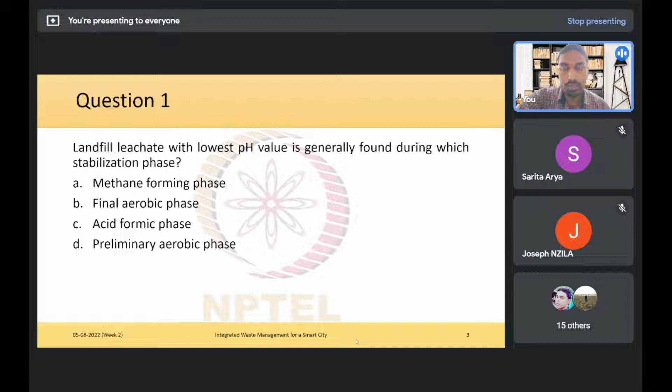So when the fluid is more acidic, it's going to have a very low pH, right? Out of these four phases, the lowest pH will be found in the acid forming phase. Why? Because as the name suggests, in this phase of landfill stabilization, the higher order molecules present in the waste are converted into lower molecular weight compounds, and then into acetic acid, right?

So if we look at the pH of the leachate across these different phases, starting from the preliminary aerobic phase, the pH keeps reducing, and as we enter the acid forming phase, the pH reaches the lowest value, then slowly starts increasing once the acid forming phase ends. When we go into the methane forming phase, it stabilizes and remains constant. Because of the acetic acid produced in the acid forming phase, the pH is lowest in this particular phase. So the correct answer is C, acid forming phase.

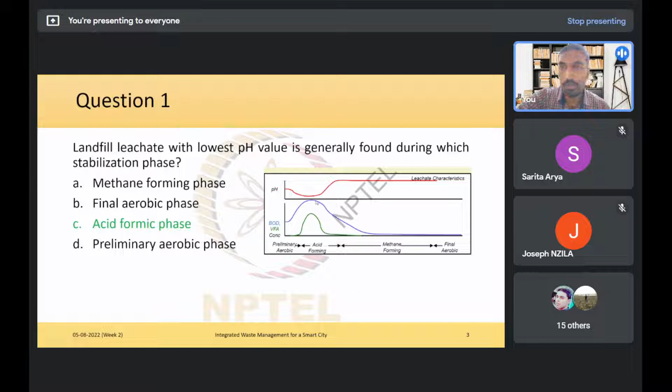Okay, so next we'll move on to question 2. Which of the following is not generally found in landfill gas? The options are methane (CH4), carbon dioxide, argon, and hydrogen sulfide (H2S). The answer to this is option C.

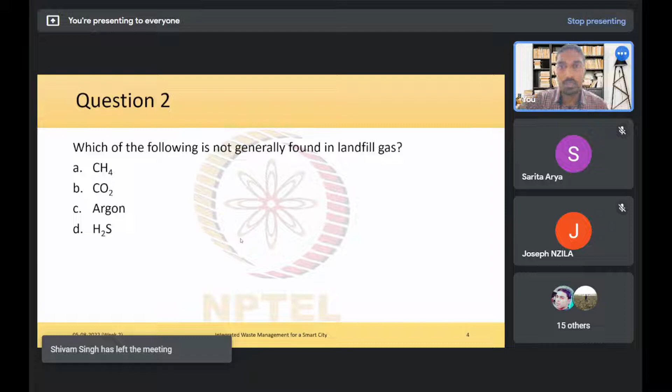Argon is an inert gas, right? When we look at landfill gas, it typically contains different gases. It contains methane, carbon dioxide, some water vapor as well, and hydrogen sulfide along with other non-methane organic compounds. In some cases, if it is hazardous waste, vapors from heavy metals can also be present in the landfill gas.

But it's not typically found. The ones listed here are what are typically contained in landfill gas. So we don't have argon, but we have all the other three: methane, carbon dioxide, as well as hydrogen sulfide. That's why it's option C, argon, because the question is asking which is not found.

So in answering these types of questions, you could follow the elimination strategy: start eliminating those options you know are not correct. In this case, we know methane, carbon dioxide, and hydrogen sulfide are present in the landfill gas, so we can eliminate them and we're only left with C, argon. That's one way to answer these types of questions.

Moving on to question number 3, again related to landfill gas. Why is the emission of landfill gas to open air a point of concern, if we don't collect it and just let it out? There are 4 reasons given: only due to its odor, only due to its toxicity, only due to the presence of greenhouse gases, or all of these—odor, toxicity, presence of greenhouse gases, and explosive gases.

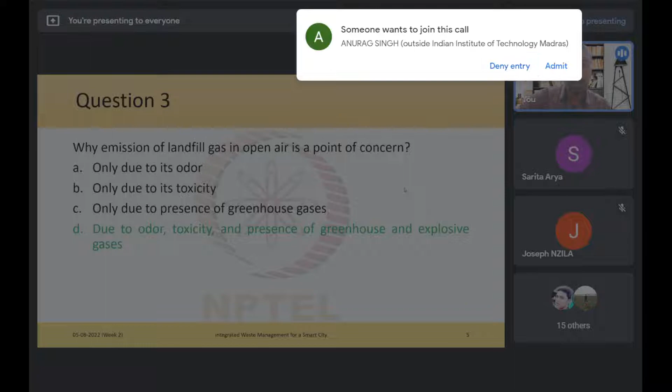As we saw, there's a mix of different types of gases in landfill gas, and each of them has different characteristics. The answer to this is D—all of these are a problem with landfill gases, as some of them exhibit these characteristics. As we saw, there is methane, carbon dioxide, and hydrogen sulfide.

Which gives the odor issues? It's hydrogen sulfide and methane, mostly methane because it's present in the largest volume. And which is toxic? CO2 can be toxic in higher concentrations. It's also a greenhouse gas, and methane is also a greenhouse gas.

And the explosive gas is methane—it's known to be explosive. So all of these are issues that come from emitting landfill gases in the open. That's why it's a point of concern that we should not let it out in the open and should properly handle it.

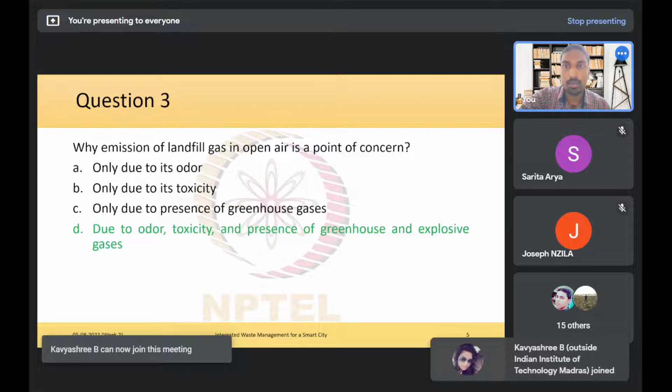All right, so question four. This is about the toxicity characteristic leaching procedure, the TCLP test, right? This was covered in lecture 7. The question is, what is the correct order that is followed in this particular test?

There are multiple steps to it. So we see in the options the different steps that are in this particular test, but they are rearranged, so they're not in order. Only in one of the options is the correct order given. So the question is, which one is the correct order?

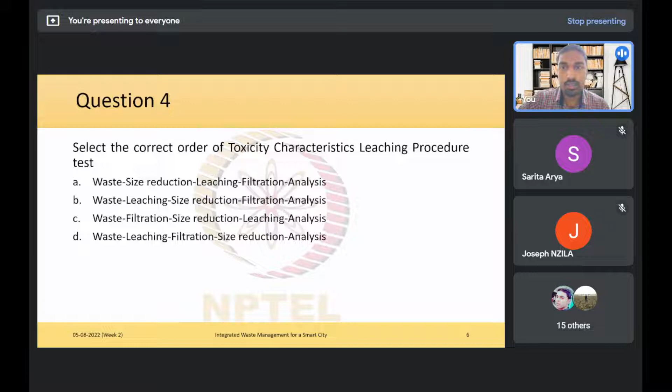Okay, so the correct order of this particular test is given in option A. First we start with the solid waste. We receive the solid waste, and then the second step is to reduce its size. We break this solid waste into smaller chunks of size less than 1 centimeter each, dividing them into these small blocks.

Why is this size reduction necessary? What does size reduction do? It increases the surface area. The area that is exposed is going to be much higher than the original solid waste that we had, because by breaking it down into very small pieces, we get a much larger surface area.

Why is that necessary? Because when we are trying to characterize the toxicity, we want to be more conservative, more strict, because it has potential to ultimately affect our groundwater resources. So we want to be more conservative and stringent, and therefore we increase the surface area so that the reactivity of the waste increases.

So once we do the size reduction, then we go for the leaching. Once we have more surface area, then we do leaching. How do we do that? We take 100 grams of this reduced sample and add it to a leaching fluid. For 18 hours we keep that in the leaching fluid at an rpm of 30.

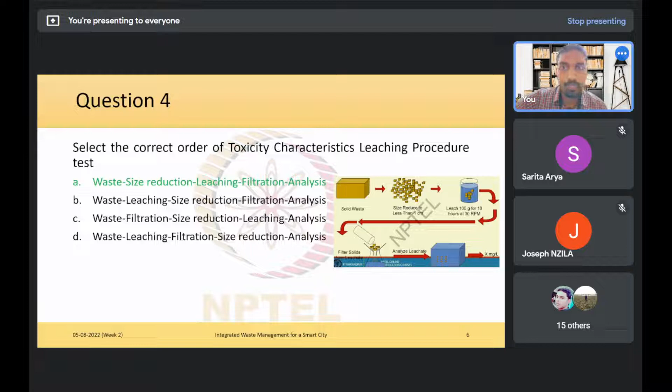Okay, I will give you a minute so you can try to solve this. In the meantime, I'll create a poll, and then once you solve it, you can answer in the poll. I think it's straightforward - if you know the formula for moisture content, you could go ahead and calculate it. So take a minute and try to solve this.

Once you solve it, I have created a poll, and then you can respond to that poll with your answer.

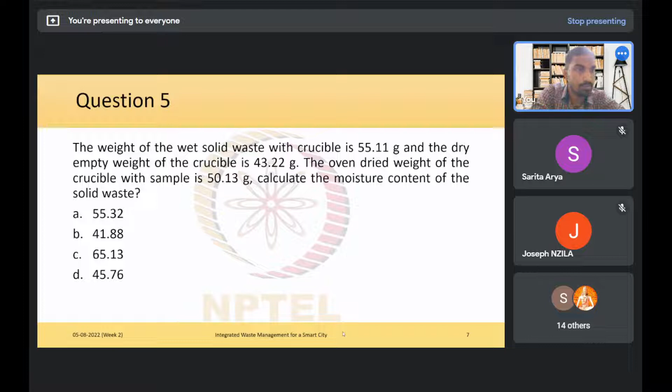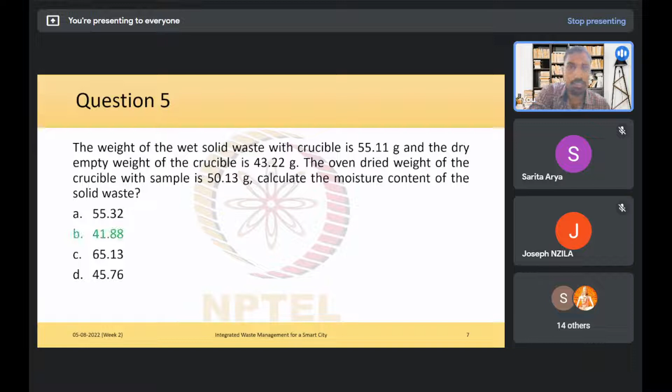Okay, I think that's enough time for this particular question. So there are a few answers - some think it is C, there is one answer for B. Okay, so the correct answer to this is actually B. How is it B? We'll see how it is option B.

Okay, so what do we know about moisture content? Moisture content is nothing but the mass of water divided by the total mass, right? So that is the moisture content. If you want to express it in percentage, you multiply it by 100. So we are given all this information to get the mass of water and the total mass.

So how do we get the mass of water? We are given the weight of the wet waste, which is 55.11 grams, and this weight is inclusive of the weight of the crucible itself. And we are also given the dry empty weight of the crucible. Also we are given the dry weight of this waste along with the crucible, which is 50.13.

So if you want the mass of water alone, we should subtract the wet waste weight with crucible and subtract it with the weight of the dry waste. So 55.11 is the weight of wet waste, and 50.13 is the weight of the dry waste. So the difference between these two is nothing but the mass of water. So we know that we got the mass of water.

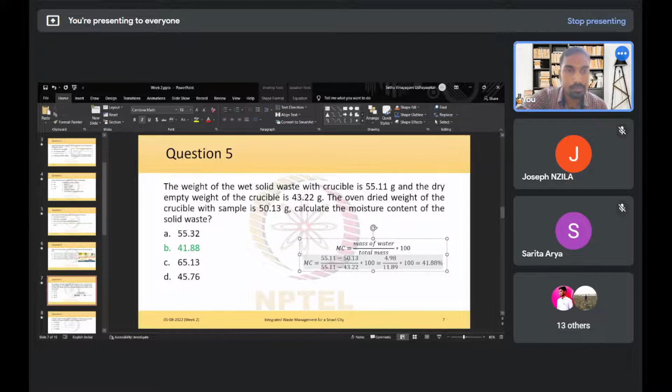So if you simplify this, the numerator will become 4.98 divided by 11.89, and then multiply by 100. So this simplifies to 41.88%. So that's how we get it. If you remember, the moisture content is the ratio of mass of water to the total mass, and once you know that, you could derive these two quantities from the information that is given. Was that clear? Why 41.88%?

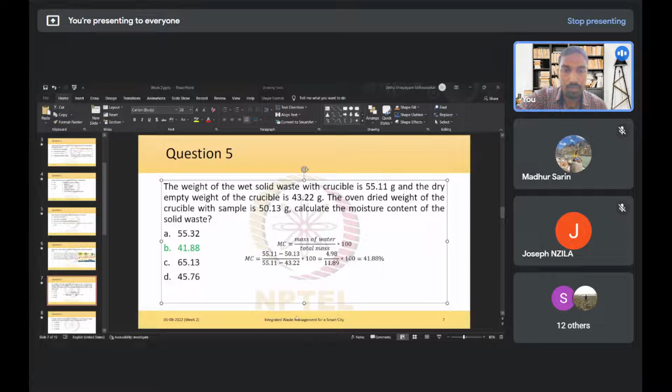Any questions? No, sir, clear. Okay, so then we'll continue. Just give me a second.

Okay, so here's question number 6. If the energy content of solid waste as discarded is 1550 kilojoules per kilogram, then find the energy content on a dry basis if the moisture content of the solid waste is 15%. So we are given that for a particular solid waste, with some moisture content, its energy content is 1550 kilojoules per kilogram. And if the moisture content is known to be 15%, then what will be the energy content for the dry solid waste?

Okay, again, you can take a minute to answer it. Again, I'll create a poll for this one as well.

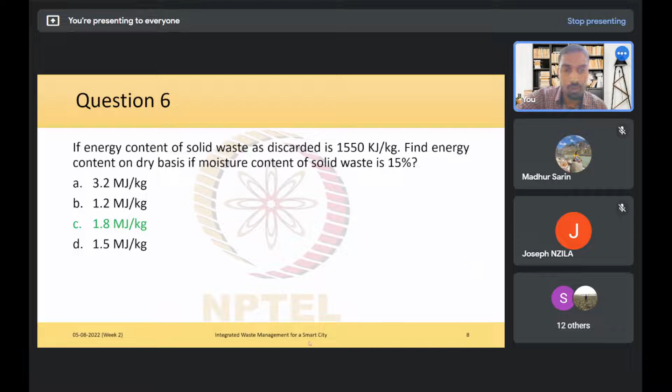That is your factor by which it will be higher for the dry component. So it will be 1550 divided by 0.85. To understand why that is, let me reshare my screen.

So think of it like this: say we have 100 kilograms of just dry waste, totally dry waste. Then we'll just do a back calculation. We know that it is going to give you 18 kilojoules.

Suppose now out of this, 15% is the moisture content. What does that mean? 85% of this 100 kilograms is your solids. Out of this 100 kilograms, that is what is going to give you the energy, and the rest 15% of it is nothing but water. So from this you are not going to derive any energy.

So this left hand side is totally giving you this 18 kilojoules, but we know that the second term, the water, is not giving you the energy. It's only this 85% of the solids. So it's not going to give you 18 kilojoules, it's going to give you 85% of it. Why? Because it was this 100 kilograms of dry waste that was capable of giving 18 kilojoules. Now we don't have 100 kilograms of dry waste, we have only 85% of it, so the energy will also be reduced, only 85% of that 18 kilojoules.

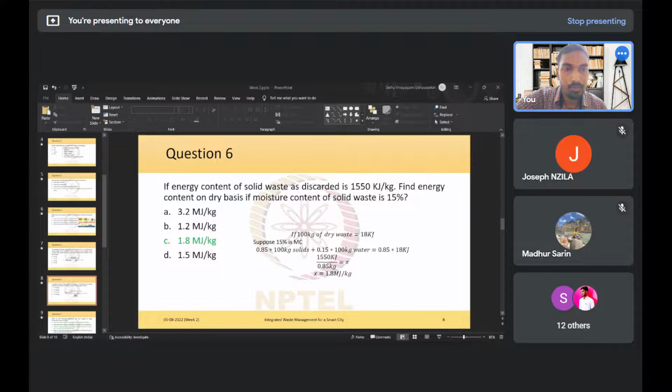Any questions? No, sir, clear. Okay.

Okay, so this was one way in which waste can be characterized. We saw the different ways in which waste can be characterized in the lectures. One particular way was to characterize them based on the composition of the different components in the waste. There were two methodologies that we saw: one was the source specific approach and the second one was the material flow approach.

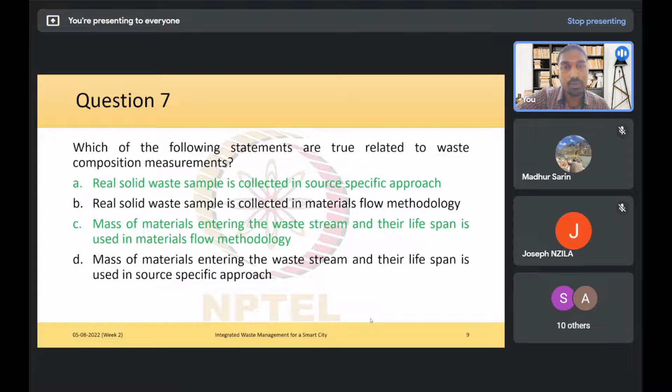So we look at what is the sales that is happening for the different products, and also we know for different products what is the lifespan or the shelf life - how long before it enters the waste stream. So we know that for different products on an average how long a product is useful. With that we will be able to estimate when it enters the waste stream, when it becomes a waste. So we will be able to calculate how much waste will be generated at a particular point in time.

So that is the material flow methodology. Here we do not directly collect the waste, but we try to estimate it from the products, the amount of product that's being sold. So those are the two ways in which we can characterize the waste composition.

Okay, so that is given correctly in options A and C. So B and D are actually interchanged, so that is not the correct definition of what happens in these two methods.

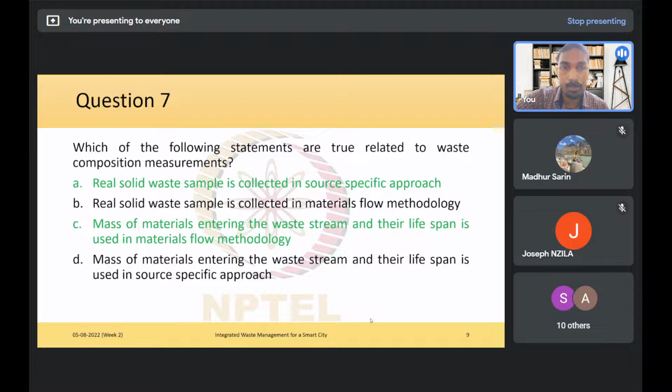Okay, moving on to question 8. Which of the following statements are true for the physical characteristics of solid waste? Again, we talked about some of the characteristics - we saw density, porosity, moisture content, and so on, and specific gravity. So here we are talking about bulk density, dry density, and density as such.

Option A, bulk density is greater than the dry density for a sample. Option B is that dry density is greater than bulk density. C is density is weight or force per volume, and D is density is mass per volume. So we need to pick out the correct ones.

So the answers are, as people pointed out in the comments, options A and D. Those are the correct definitions of bulk density as well as density, or the correct statements about bulk density and density.

So why is bulk density greater than dry density? What is the formula for bulk density? It is the total mass divided by the total volume. Whereas for dry density, it is the mass of solids divided by the total volume. So if you compare these two, the denominators are the same - it is the total volume - but the numerator is different. For bulk density, it is the total mass; for dry density, it is only the mass of solids. So the mass of solids is going to be lesser or at least equal to the total mass.

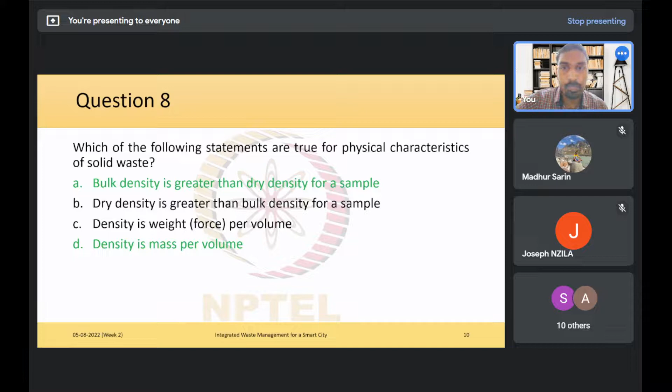Moving on to question number 9: which of the following represents the phases of landfill stabilization? We looked at this in one of the previous questions, but here one of them is not correct - one of these is not a correct phase, so we need to identify that. Option A is methane forming phase. Option B, preliminary anaerobic phase. C, acid forming phase. And D is a preliminary aerobic phase.

Which of these represent the correct phases, or which of this is not representing the correct phase? Either way you can say - we'll answer which of these are correct, so multiple answers will be there.

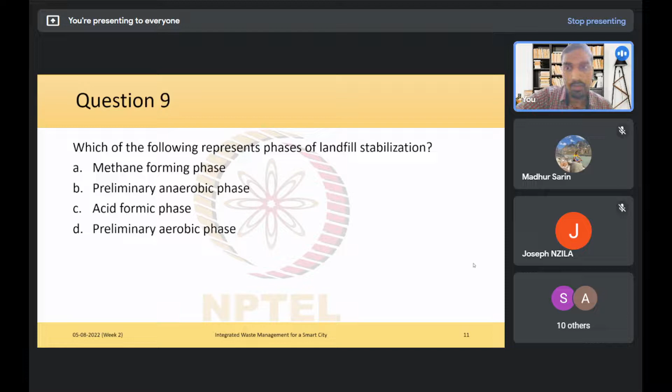We have some answers in the chat: A, C, and D. Yes, that is correct. A, C, and D are the phases that are present in a landfill stabilization.

If you remember this process diagram from the lectures, initially we start with an aerobic phase - that's the preliminary aerobic phase. Then it moves on to an anaerobic phase once we have covered the landfill. In that phase we have the first acid forming phase, followed by a methane forming phase, and finally again we have an aerobic phase to complete. So we don't have any anaerobic phase at the start of this stabilization process - that's why this is a wrong option. The anaerobic degradation takes place in the middle portion of these landfill phases. We start with aerobic, end with aerobic, and in the middle we have some anaerobic phase. That's why A, C, and D are the correct phases, whereas B is not.

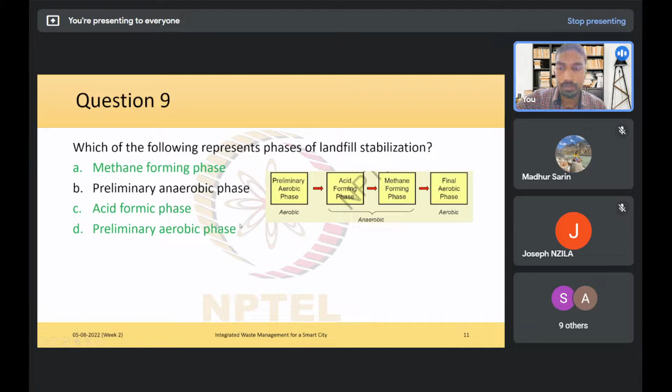Moving on to question number 10: which of the following statements are correct related to landfill gas collection wells? We have four options. Wells connected to a gas extraction system are known as passive wells. Wells open to the atmosphere are known as active wells. And then these two are interchanged in C and D: wells connected to a gas extraction system are known as active wells, and wells open to the atmosphere are known as passive wells. This is based on the definition of how we define what is a passive well and what is an active well.

The answer is, as given in the comment chat, it is correct - C and D are the correct ones. By definition, active wells means the well has a gas extraction system - we use vacuum to pump out the gases from the landfill, extract it, and then we can flare it or use it for converting to energy or heat for other processes. Or if we just let it be open to the atmosphere, in that case it will be called a passive well. So these are by definition.

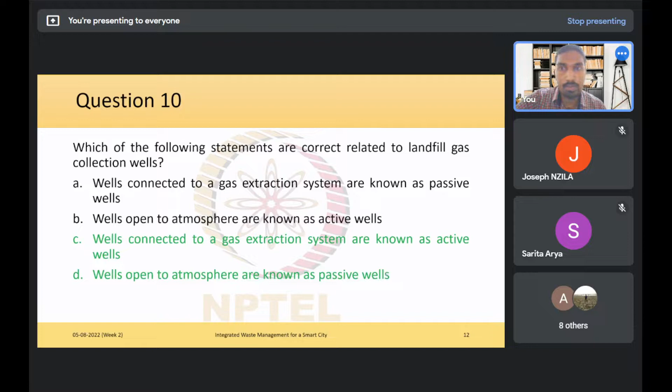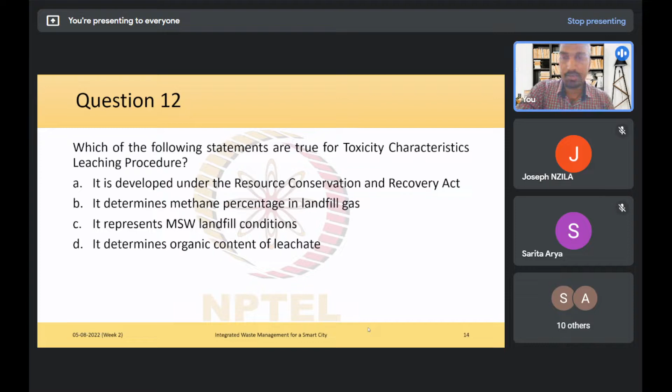Okay, A and C. Any other answers? Okay, only C. And this is a multiple select question, multiple options could be correct at the same time. Okay, C, everyone agrees C is true. Any other options that could be true among A, B, and D? Okay, again A and C. All right, so you're correct.

So both options A as well as C are true about the TCLP test. If you look at the TCLP test, it was developed as part of this Resource Conservation and Recovery Act in the US, so option A is true. Whereas B says it determines the methane percentage, so we don't deal with the gas, right? As the name suggests, it is about the leachate. We are going to test the leachate for its toxicity, we are not working with the landfill gas. So B is not true.

C, it represents the municipal solid waste landfill conditions, right? That's why we looked at doing it by leaching it with the use of leaching fluid. That is trying to accelerate the leachate process. We also try to reduce the size so that it would react and then produce the leachate and then filter out and get only the leachate.

So we are trying to replicate or be as representative of the landfill conditions, or even more conservative, so that we are more sure of what is going to happen in the worst case. And option D, it determines the organic content - so again, we do not look at the organic content. We are trying to determine the toxicity, the concentration of the different chemical content. That's our goal in this TCLP test, not to determine the organic content. So only options A and C are true about the TCLP test.

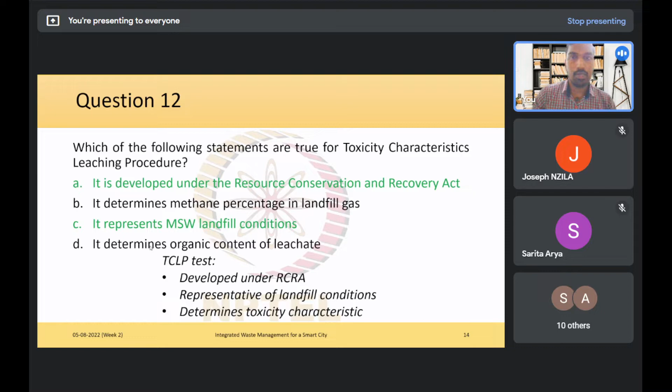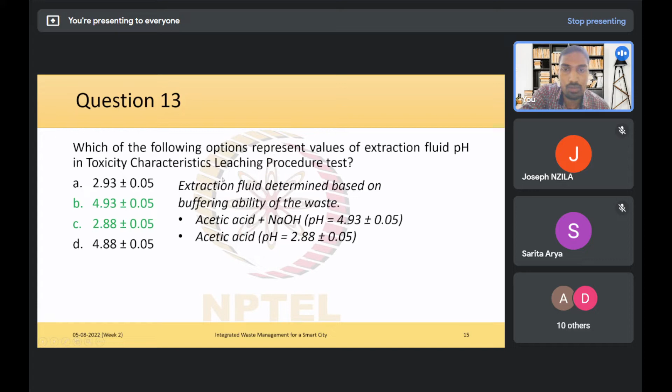Okay, so the answer is, as many of you have said, B and C. If you remember, these are the two fluids we use. One is acetic acid plus sodium hydroxide - that's the typical one we use mostly, with a pH of 4.93 plus or minus 0.05. Why do we need that? We need this buffer so that the pH remains constant - it doesn't vary too much throughout the test. It should fairly remain at the same value for the period of the test, so that's why we need the fluid with buffering ability.

We use acetic acid because that's what is going to be present in the landfill. During the acid forming phase, the acidogenic bacteria produce this acetic acid, which leads to leachate formation. We want to replicate that, so we use acetic acid - 4.93 for that combination. In another case we can use just acetic acid with a pH of 2.88 plus or minus 0.05.

So when do we use the second option? When your waste is very basic - if your waste is going to have a pH of 11 or more, a very high pH, in that case you need your extraction fluid to be more acidic, so it should have even lower pH than 4.93. In that case, it's specified that we should use acetic acid with 2.88 plus or minus 0.05.